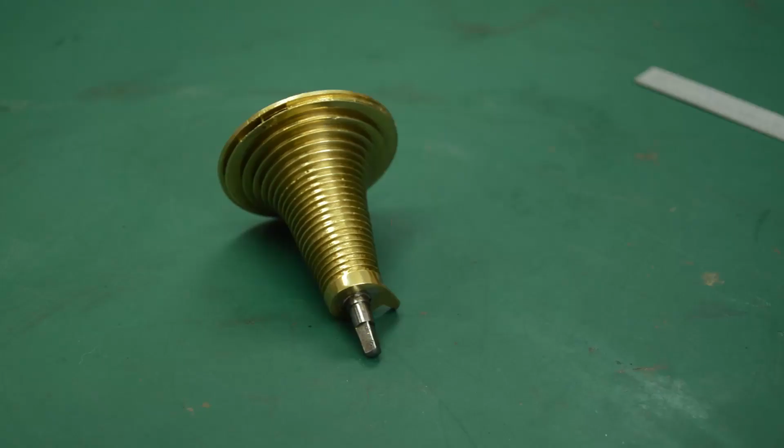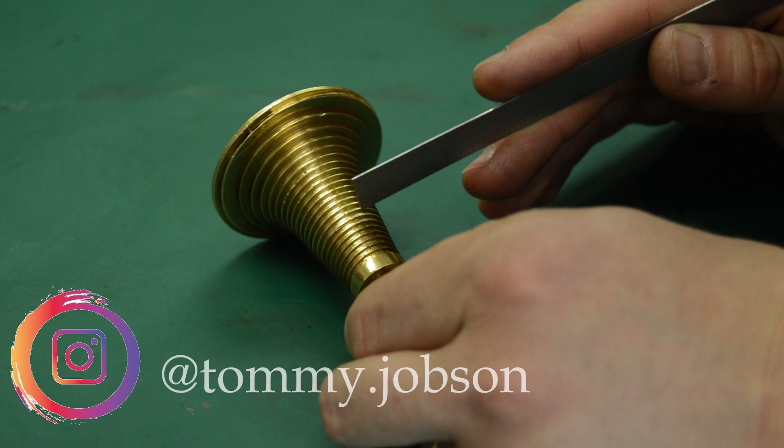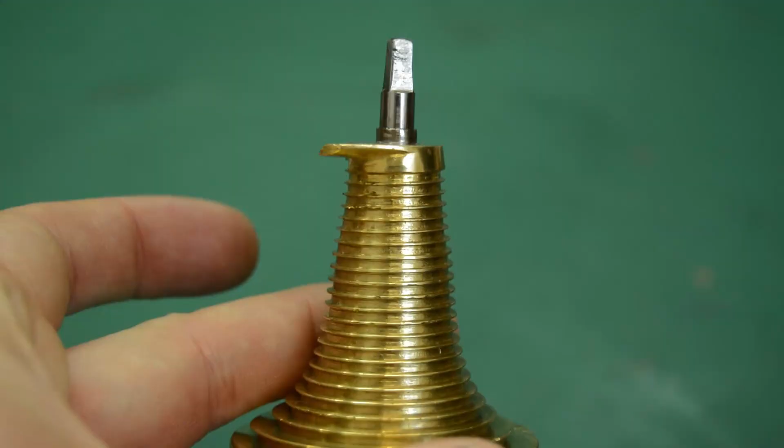There's a job to do here on this Fusee. It's at some point been extended. It was originally either a much shorter Fusee, or there's been some damage at the top end here, possibly to do with the stopwork, which has caused them to put a new nose on the end of it at some point.

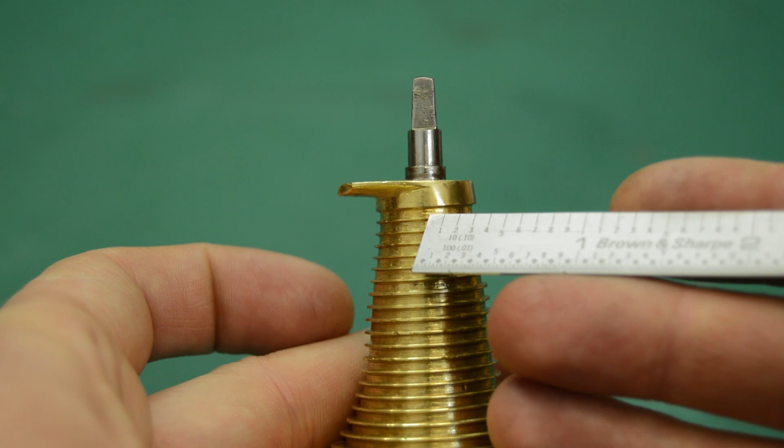The problem is, can you see how the top few turns dive off at quite an acute angle? If I present a straight edge here, you can see they dive off quite suddenly at quite a steep angle. This is about the smallest diameter you're going to want anyway, but by diving off at this steep angle, you end up with a really tiny diameter at the top, and it's causing power issues with this clock.

It hasn't got enough power when it's fully wound. So what I'm going to do is turn off this section at the top here and replace it and recut the thread, but make it parallel from the point back here, because the clock works very well at this point. So I'm going to make it parallel all the way along, so we don't reduce the diameter down as steeply as that. That's the job for today.

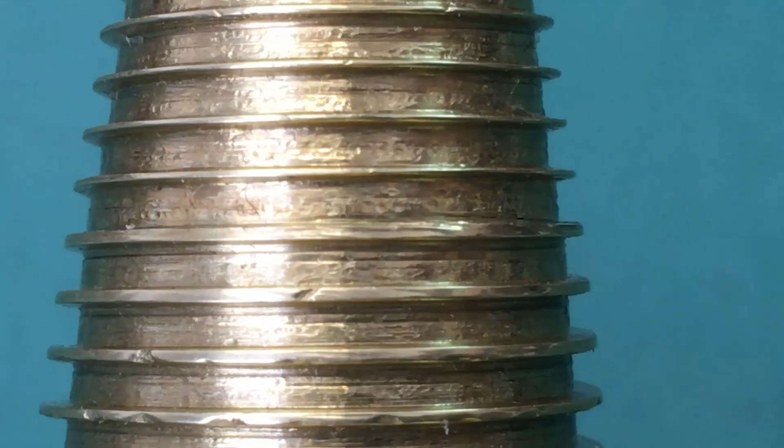Now you can quite clearly see the joint lines where the Fusee has had the extension piece fitted, and if you look carefully you can also see that the lands of the threads are much thicker on the original part, and much thinner on the part that has been replaced.

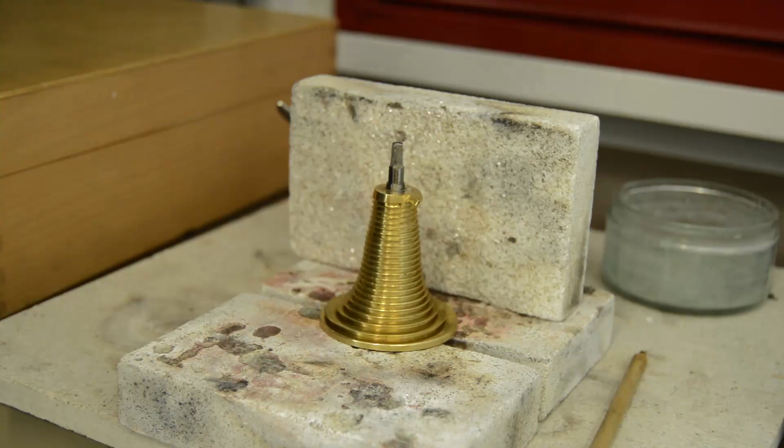So I'm going to try and replicate the thicker sections of the original part as I replace this extension piece. I just thought it would be good to point out the joint line there. I don't know if this will work or not, but I thought I'd try just heating it up and seeing if the soft solder joint would break, because you can clearly see that the extension has just been soft soldered on.

Bingo! Now there really is no doubting what's happened to it. So the job then is to make this part fitted to there and get the clock going.

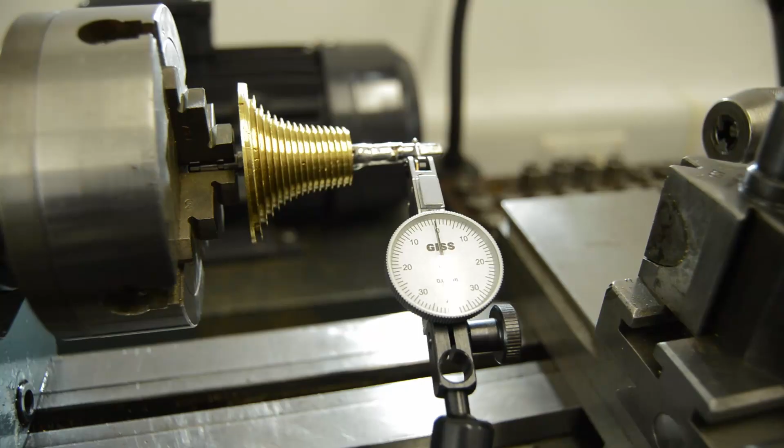Right, and after much messing around, I managed to get this chucked up in the lathe. But if you look at the indicator, can you see it waving around a bit? I think that's largely because the journal that we're indicating on is not actually round. It's been filed up over the years and is not a true round journal, so we're getting a bit of indicator wobble because it's acting like a cam really. So it's in as accurately as it needs to be at this stage anyway.

So what I'm going to do as the first step is turn off this solder here. What we'll do then is machine a slug of brass that we can soft solder back onto this, leave it all oversized in every dimension, and then we can machine this directly.

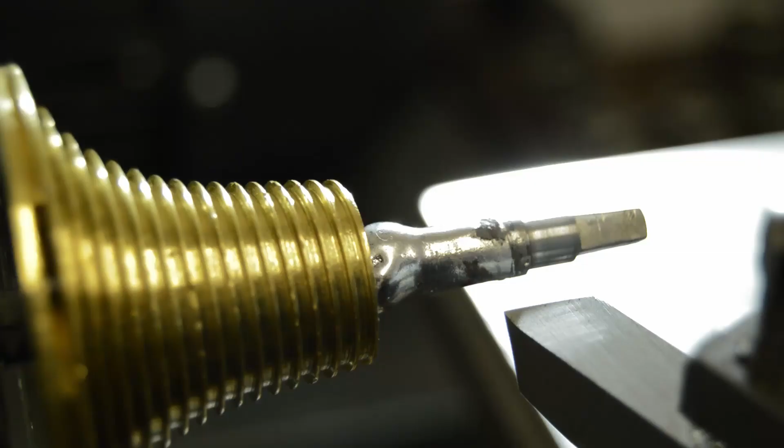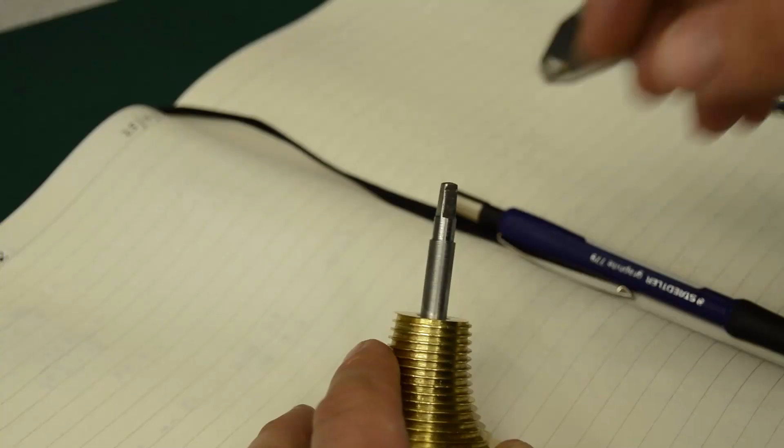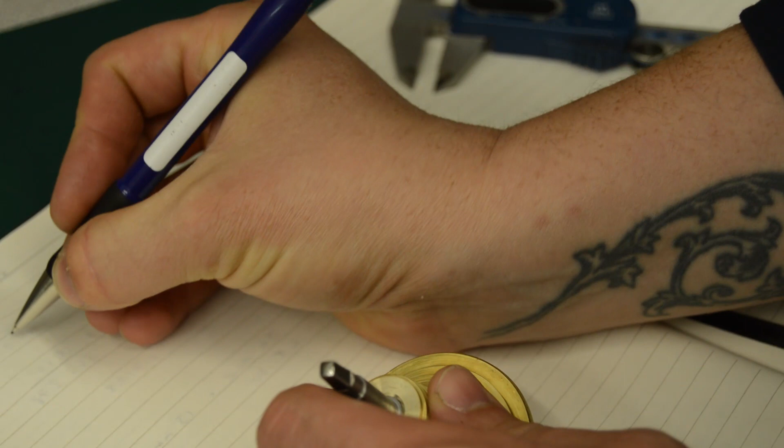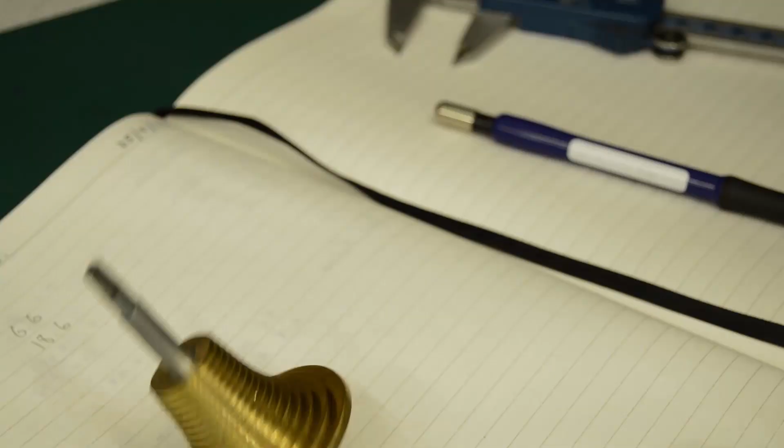You need to just decide what this slug is going to look like. So 6.6 is the bore, and we need it to be approximately 18.6 long. Let's go over to the Smart & Brown and make a blank.

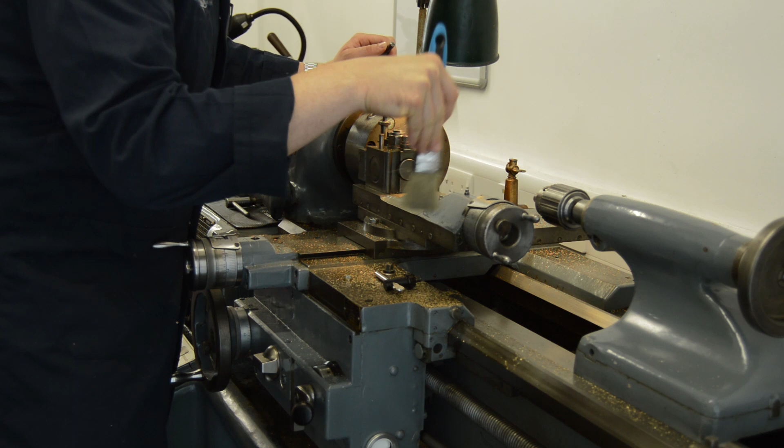This is probably why it's a good idea to clean up after each job, because then you don't have to clean it up before you next go to the machine. So give myself a little telling off for leaving the machine dirty. And cut to the lathe being nice and clean.

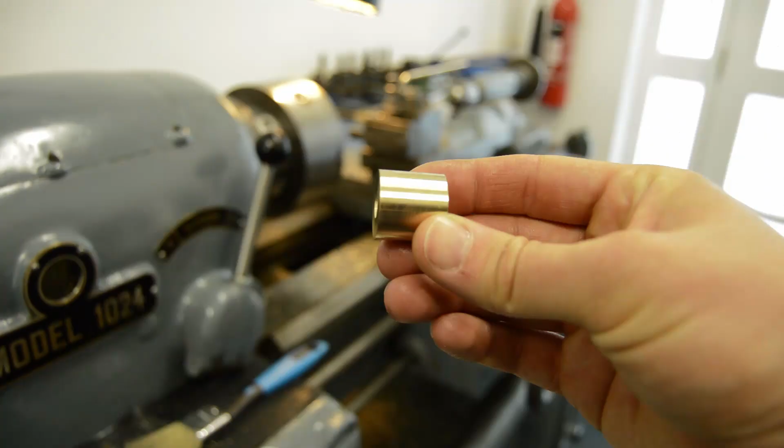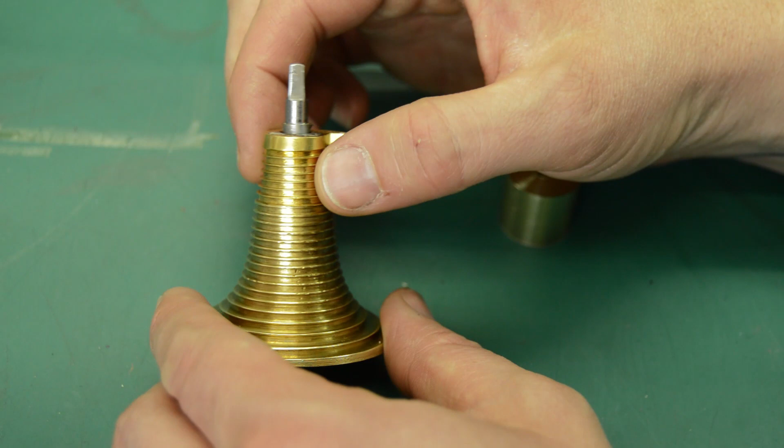Right, so back at the bench, we've got the Fusee here with the old section, which was just soft soldered on, as you saw before. Then this is the blank slug that we've just turned up on the Smart & Brown. I've made it so that it's a good fit, but it is a sliding fit, so that will allow the solder to run up the joint.

I've also put a reasonably hefty countersink on the inside, and again on this part I've put a bit of a countersink, so that when the solder runs it will pull in that joint and make a good bond, because we don't want this to move, since this is going to have the stopwork on it.

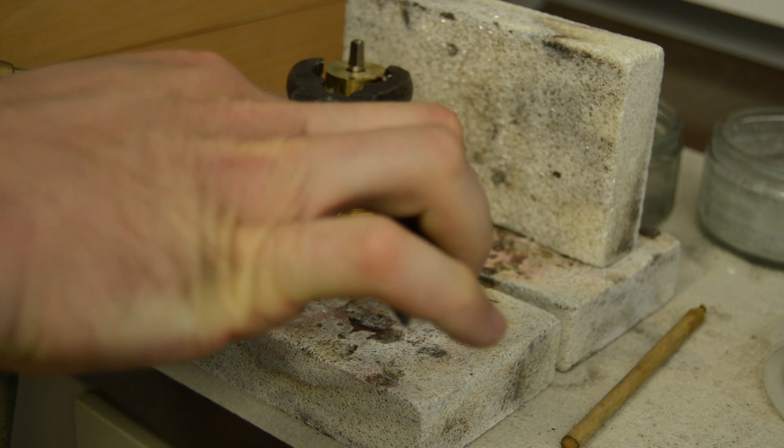Okay, I'm pretty happy with that joint. The solder has flowed all the way through, and I think that's going to be a pretty strong joint. I don't think that's going to go anywhere.

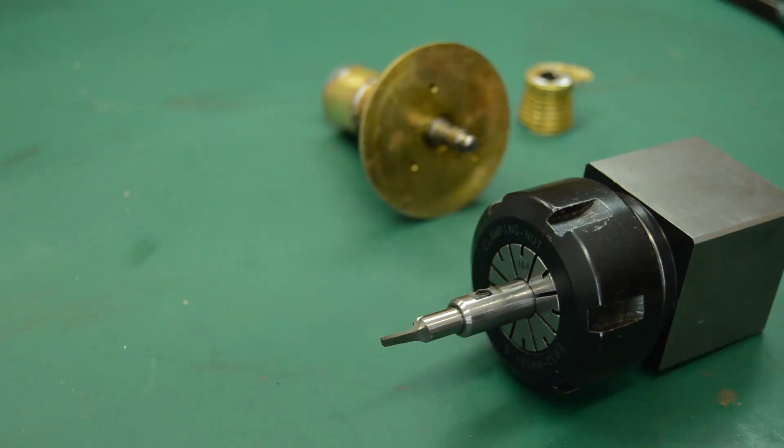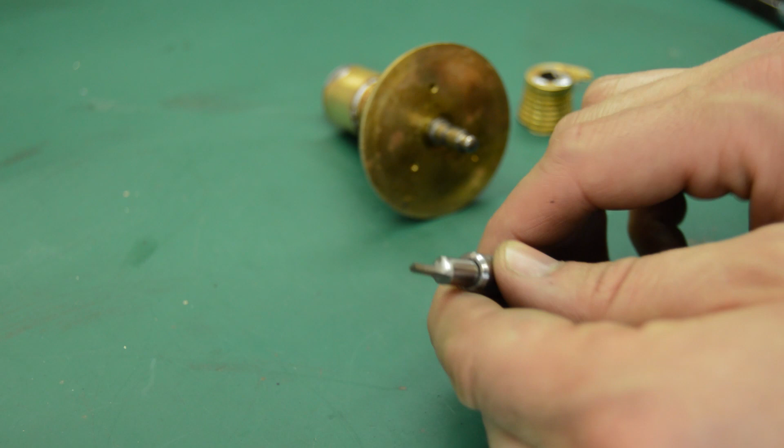Right, so I've just been to the grinder and I've made up this tool, and I used the collet block here to get the angles on it. Unfortunately, my D-bit grinder is out of action at the moment, otherwise I would have loved to have used that. But anyway, I've made up this tool, and this is now ground to act as a cutter for replicating the grooves in this fusee.

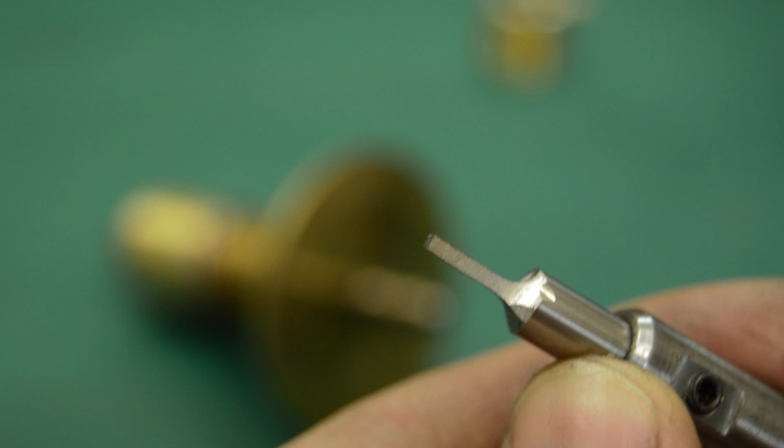Okay, so you can see the angles on the cutter here. It's just a very simple cutter with relief, which is going to plunge cut the thread for the groove for the fusee chain.

Now, after I've made the cut, I'll almost certainly need to just tidy up the tips of the grooves with a file, but we'll cover that when I get to it. But that's the cutter for now, and that will go into the grooves of the fusee like that.

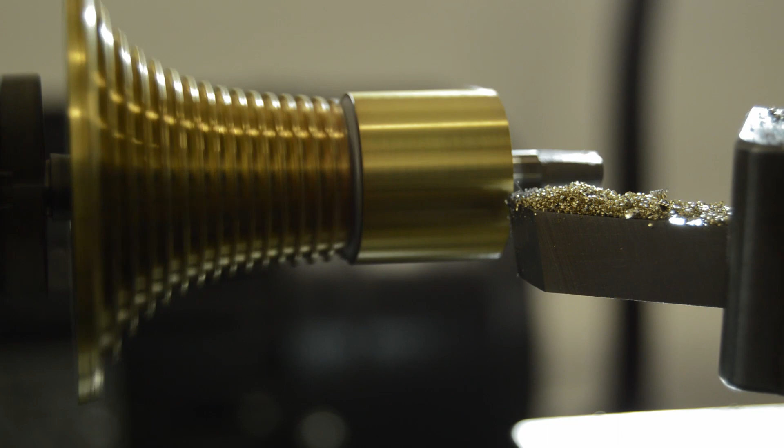I'm now going to take the diameter down to match the smallest diameter of the older part of the fusee. Again, I'm just going to go at it very gently, taking very light passes.

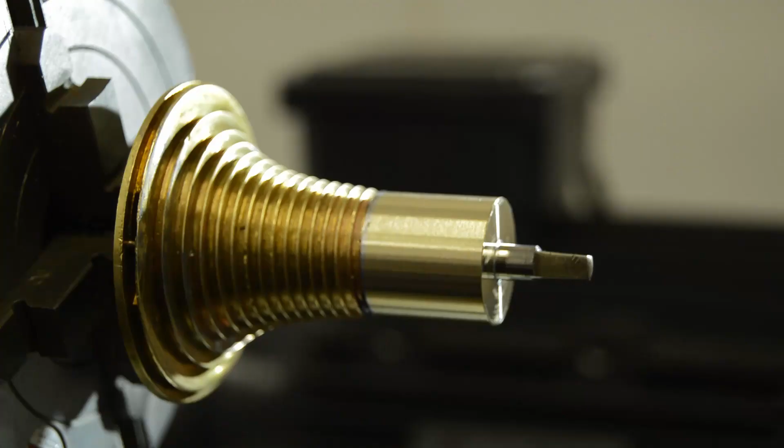I'm just about ready to take it out of the lathe now, and what I've done is to tidy up the bearing surface while it was still mounted concentrically. I used a pivot file in the traditional way on the pivot, and then a burnisher - I usually do it from underneath so I can see what the surface is doing and really play with the burnisher to get a nice finish. That's probably not the final finish of the pivot, but at this stage it was a good idea to take advantage of the concentricity.

Finally, before taking it out of the lathe, I'm going to turn down the face here to give me space for the stop work, the snail for the stop work. I'm going to do that with a centre boss for it to mount on concentrically, and then it will be fitted with 2 screws.

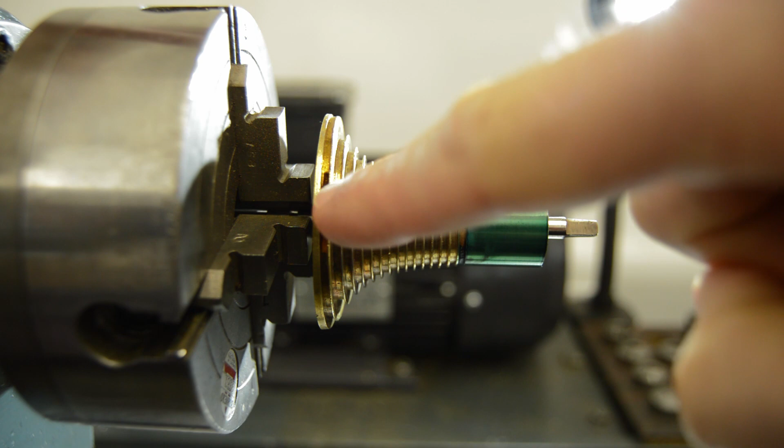Okay, so the next stage is to cut the threads. This is essentially a screw thread on the old part of the fusee here, and in order to carry that onto the extension, I need to know the pitch it's already cut at. To do that, I need to measure the distance that a known number of threads takes up, then I can work out the pitch.

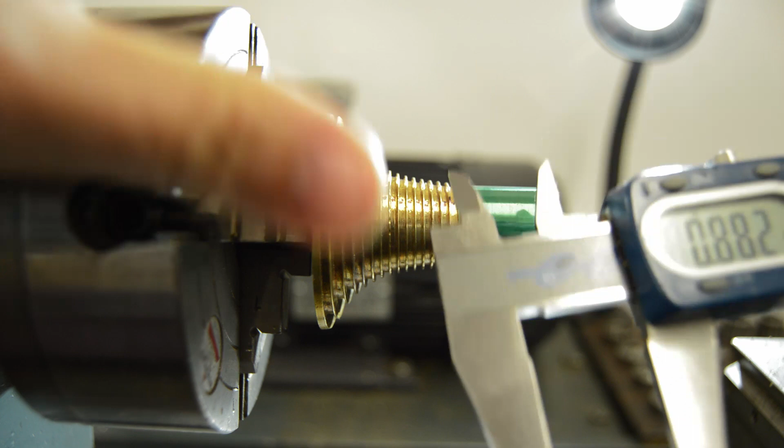I've done a couple already off camera, but let's mark this one up, go from about here to as much as we possibly can, so here. Starting from there: 1, 2, 3, 4, 5, 6, 7, 8, 9, 10 full turns over a distance of 0.882 of an inch. So we counted 10 full turns over a distance of 0.882 of an inch.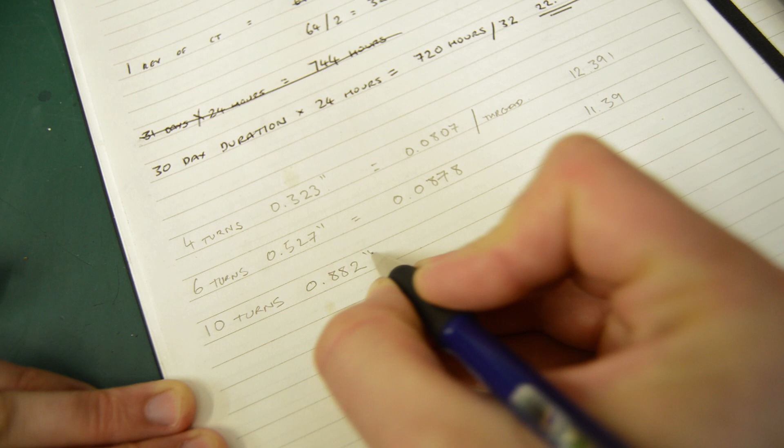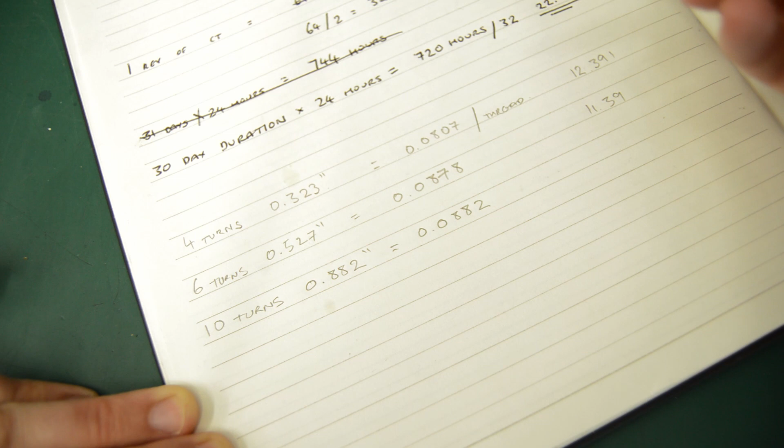So previous samples that I've taken: over 6 turns, 0.0878, and over 10 turns, 0.0882 - so we're homing in around the 88 mark. If we take 1 and divide it by 0.0882, that gives us 11.34 as the pitch. The previous one came out at 11.39, so we're getting there, around the 11.35 kind of mark.

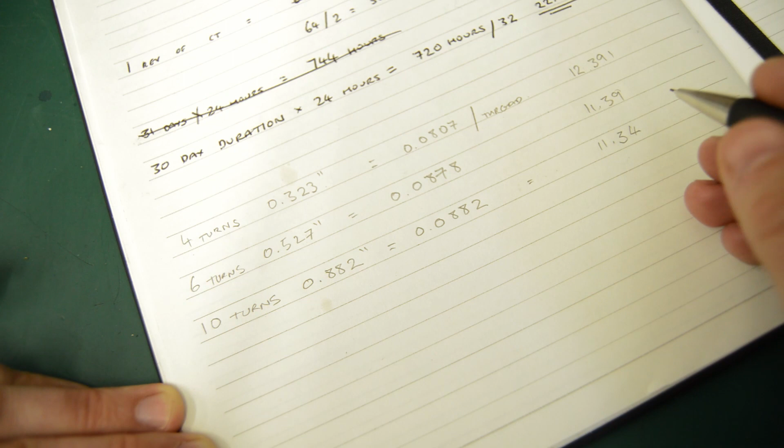We'll have to go over to the Smart & Brown and see what threads are available. So I've had a quick look, and if we convert our numbers into metric, things work out a little bit better - we're aiming for a pitch of approximately 2.2.

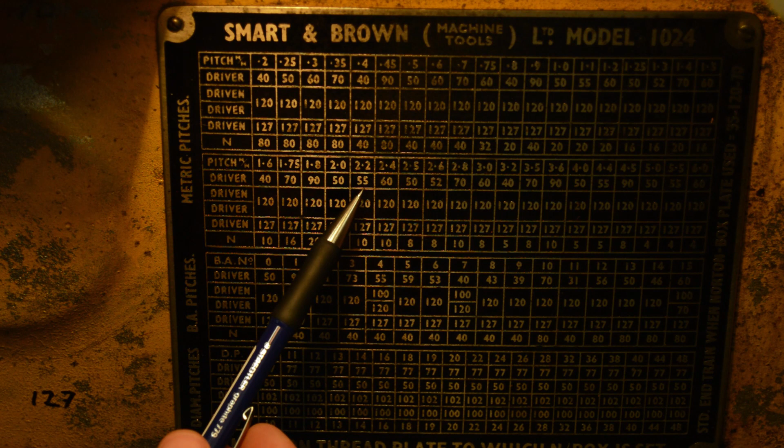So if we look here, 2.2mm pitch on the metric pitches chart, that means we're going to want a driving gear of 55, a driven gear of 120, and then another driven of 127, and we're going to set the Norton box to 10.

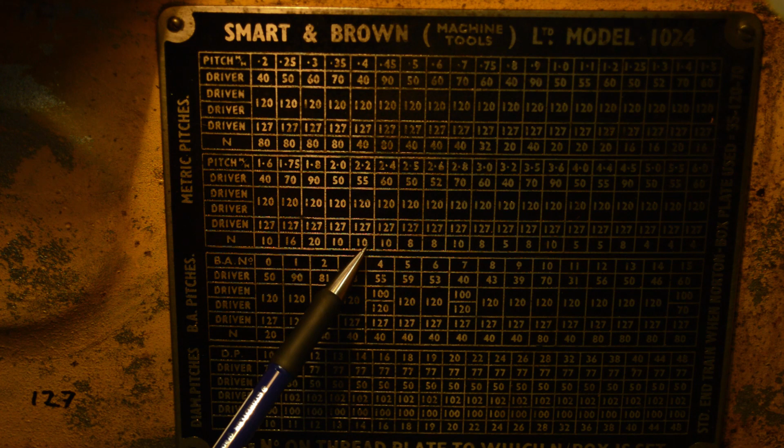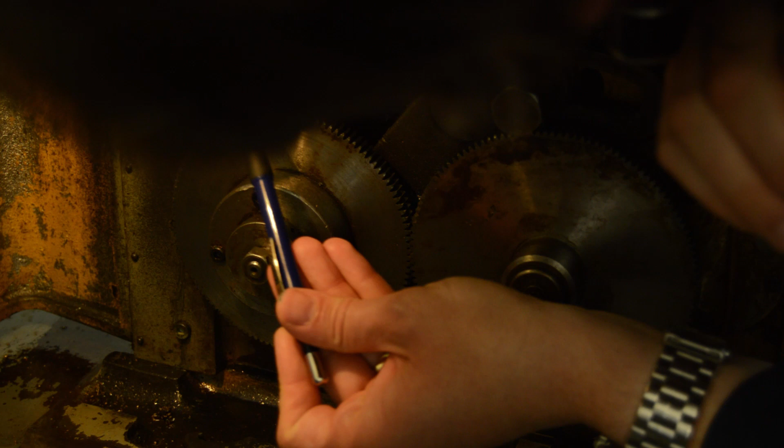So let's have a look how we're fixed so far. So far we have a driver - we want 55 and we have got 60, so that needs changing. We want 120 and we've got 120, so that one's okay. And we want 127 and we've got 127, so that one's okay as well. So we just need to change the driver up here and we should be good to go.

Just looking at the spanners to do this job - I'm a sucker for this kind of thing. This is an original spanner to go with the lathe, Smart & Brown. Nice that that's still knocking around.

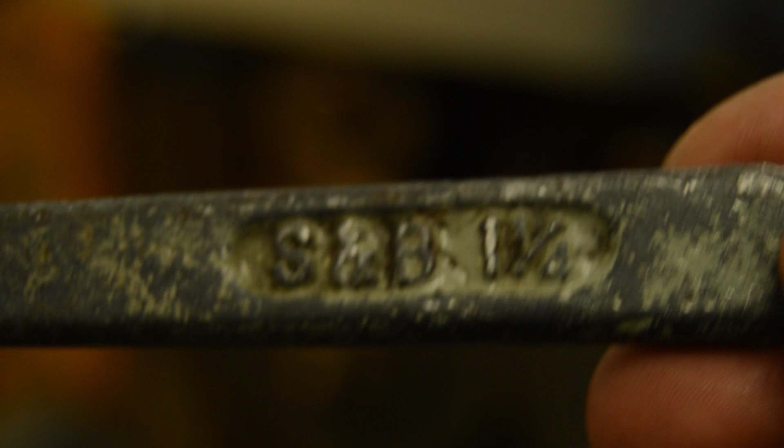Anyway, so what we're going to do is change out the top, which is the driver. So now we've got 55 on the top, 120 and 127, which is what the chart is calling for.

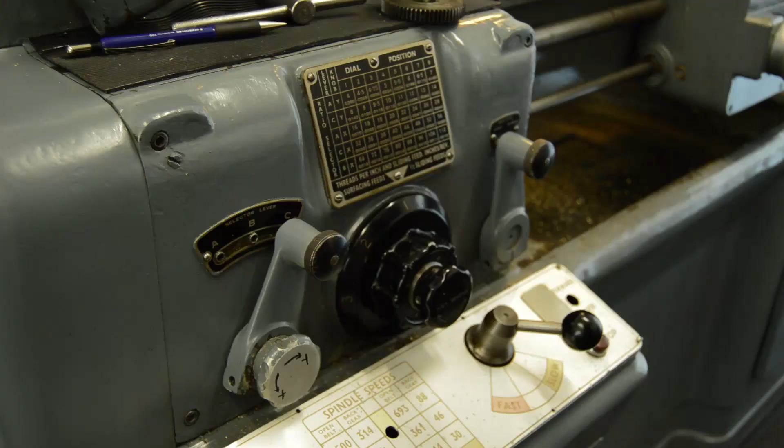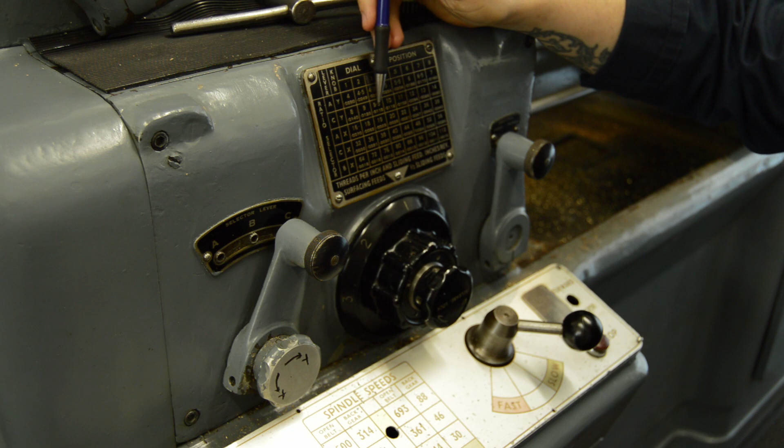The next thing we need to do is put the Norton box into 10. This is the Norton box fitted onto these Smart & Brown lathes, and we want 10, which means we need the dial position to be in number 4, the knob to be in position Y, and the lever, the selector lever, to be in position C. The selector lever is already in position C, so that's okay.

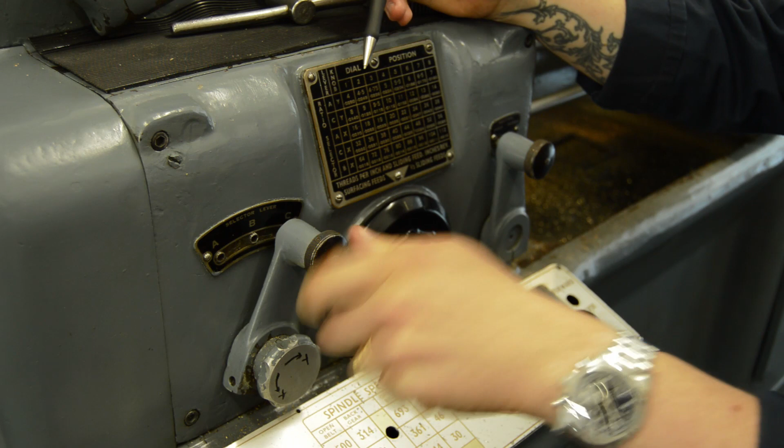Move that over to position Y, then slacken this off here, and move this round - 2, 3, 4, okay - then walking back down again. So idiot check: we want 10, so position 4, 4; we want Y, Y; and we want the lever in C, C.

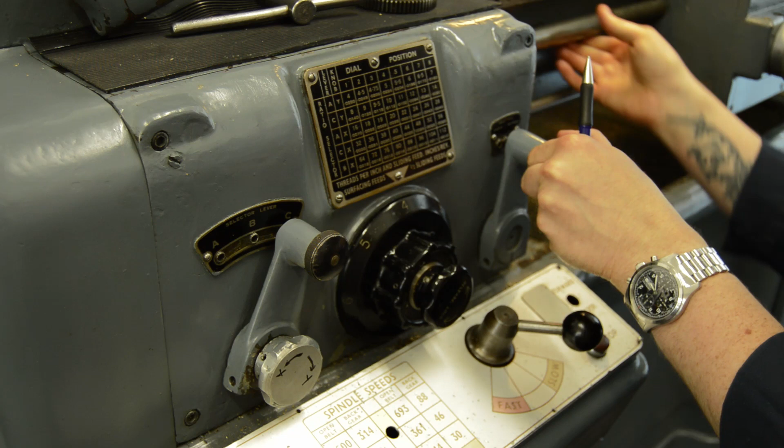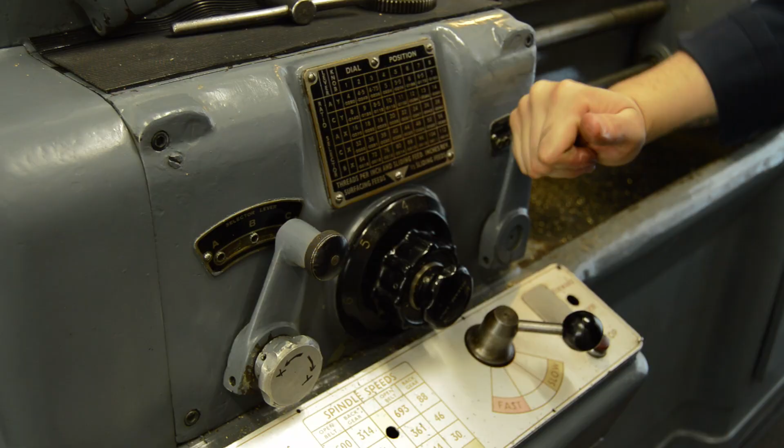Okay, so that should, if we put this into screw as well, be going to feed the carriage at 2.54mm pitch. Okay, so I've dialed that in pretty well - you can see it's within about 0.02 of a millimetre, so it's good enough for this operation.

So the next thing I'm going to do is mount up the tool in the machine and see how it looks - see if the pitch that we've set the machine to looks similar to the original part.

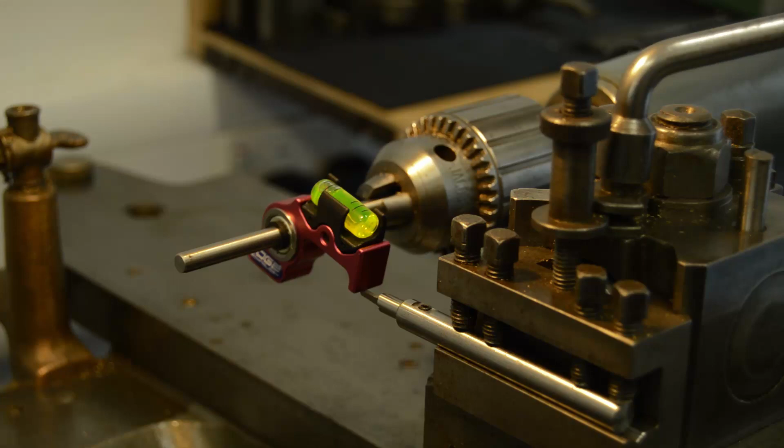I thought you might just like to see this nice little tool here from Edge Technology for raising up cutters to their centre heights. Normally you would use it in the headstock to set your cutter heights, but in this case you can also do it in the tailstock, because obviously ideally your tailstock is going to be on centre.

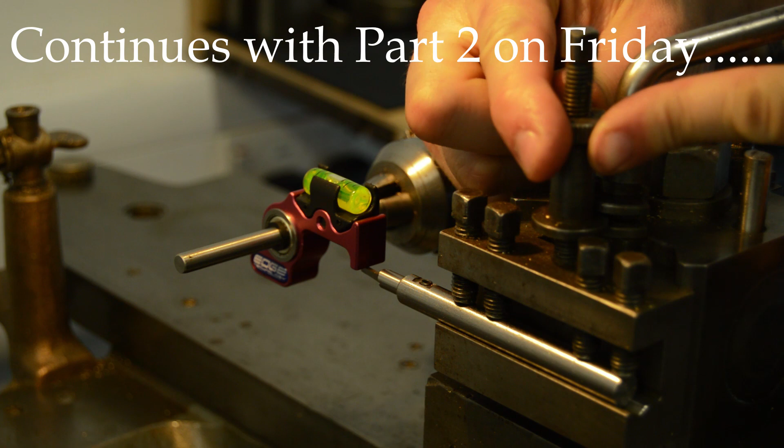So we are a mile away at the moment, so let's just raise up the tool holder, and you can see the spirit bubble start to move as we get closer to the centre height. What I tend to do is go slightly under, just nip it, and then pull it through with the adjuster here. Spot on. Let's make sure it's still spot on when it's tightened up, which it is. So that's brought our cutter up to the centre height.